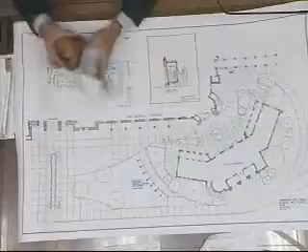...of the exterior walkway adjacent to the historic terminal, which, as you know, is being moved over to a position in front of the new air terminal, using the larger plan here. So it's along this walkway that we're talking about. The idea is to create a steel stanchion, so to speak, that would hold what we're calling these glass flags. We're looking at some technologies, a couple of ways to do that, and I'll pass out some samples.

Part of the idea came from an artist at the SeaTac Airport in Seattle who created a commemorative artwork on glass, displayed in their terminal. It's backlit on the inside of the terminal, and it depicts the historic nature of the Northwest area. That's a product or technology that uses glass to laminate the artwork.

We're also looking at other technologies. This is an example of a man-made product, and I've got a couple of examples to pass out, where the artwork is laminated into an acrylic or polycarbonate type material. The idea is that piece would be placed in here.

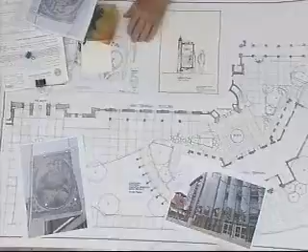Now the actual artwork, the content of what I'm calling these seven flags, would be subject to an artist RFQ process and selection process similar to the ones we used to select the three artists working on the interior of the airport. The Claysons Foundation has agreed to fund that process, the selection of the artist, and then the execution of the actual installation. So that's a very quick overview.

Here's a copy if people like to look at. That's the technology they use for the glass component. This happens to be the artist who did the work at SeaTac, utilizing a glass studio that does this work in Germany. We're not quite sure that's what we'll do yet, but that's the idea and concept. I have other material I can share if you need it. Essentially, that's where we are, and we'd like your comment, input, and so forth today.

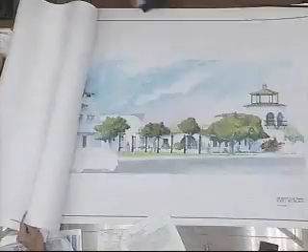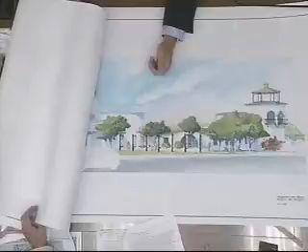We're assuming, based on the process we'll go through selecting artists, that it's not going to be a detailed piece of art that one has to walk up and see within a few inches. The idea is to tell the story in such a way that within a few feet, as you pass through and walk by, you can get the gist of the significance of the Marines being here during World War II.

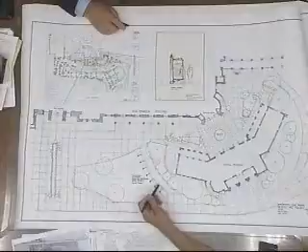Paul: Thanks, Gary. If we go back to the site plan, I have a question, following up on Gary's point. This is where the base touches the ground and the glass piece cantilevers. Do you have any visions of taking this hardscape so people can step into this area, or do you specifically have it so people won't be putting their nose right in front of it, two inches away? Yes, and we did that because there are some maintenance and abuse problems. So the idea is you can visually see it at a distance of 2, 3, or 5 feet, but there's probably no need to actually walk up and touch it, so to speak. Okay, thanks, Clay.

Mr. Chair, are there any UV issues? Will these things fade over time? That's part of the material selection process. We understand from the glass manufacturer that supposedly that's not a problem for their product, but I'm trying to get data on impact resistance, since you can imagine the issues with using glass. This material is supposedly impact resistant, but I haven't gotten an answer from the manufacturer yet on the UV factor. Supposedly it won't fade, but we want to make sure before going down any specific road that we have the material in hand. Leave it out on your porch for a few weeks and see what happens.

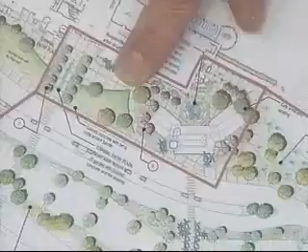That was going to be one of my questions, the impact and safety. I'm also curious, do you happen to have the landscape plan with you? I'm wondering what the planting scheme is. It's this drawing up here on the right, though I don't have the working drawing planting plan. What isn't shown in this plan is a tree that's on the actual final plan, right here, and this tree on the lower piece has to be moved over a little bit. And then there's a tree right here, so we just have to move that tree a bit to make this all work.

So has there been an approved final planting plan done? Yes, it's already in, so we have it somewhere, on file. Tony, do we have a copy of that here? I can go get it for you. I just want to make sure it's not agaves or something that people are going to walk up to and get spiked. No, it's that low grass material in between all those. So we have to rearrange that just a little bit. I think it's fine, Tony.

Okay, thank you. I had just two questions. Is this the final resolution of how this walkway enters with the patterns going on here? Yes, that was what was approved when we went through the ABR. Okay, I wondered if some study could go into these kind of confluences happening here, where walking right into the middle there is... Anyway, that's one question. The other is, it seems to me - I like the concept...

It seems to me that when you stand very close here, from here, this one is not too bad. It seems you're always looking at that screen from at least 20 to 30 degrees angle, and you never get to see that screen straight on or close to straight on unless you stand right at this edge. So as you walk along, if you're in the middle, you're virtually seeing that at a 45-degree angle from the middle of the walkway. Keep in mind these are viewed from both directions since they're transparent, so if you're walking this way, you're looking at it too. And the same thing happens here - you're seeing it at 45 degrees. The first view here you're probably seeing straight on, but here, from that center, you're still at 45 degrees. Is that an effective line for you?

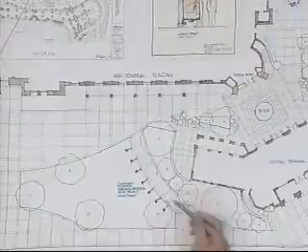We think that is. The idea is not that any one panel will tell the whole story - it's this whole collective idea of the panels. Also keep in mind that because of the nature of this project, it's an airport, so for the most part people are either coming or going and in some kind of time sequence, fairly busy. It's unlike an art museum where art sits there to be contemplated and looked at in detail. This art is meant to be captured almost like driving along the freeway - certain buildings have impact when you see them out of the corner of your eye. So that was the idea here: all seven flags tell the story, not any one singular flag. That's the challenge we're going to give the artist. I'm not opposed to moving the walkway out, but the concept was that this isn't the type of art you need to sit and contemplate.

Mr. Chair, another quick question - are these mainly images, or is there text on these panels? We're not sure yet. That's part of what we're still working out.

If you saw in the examples that were passed around, and this is the one in Arkansas, you'll notice most of it's visual images, but there were a couple that had dates on them or some text. Again, the idea is to see this kind of general overview, so it won't be detailed writing. There's no intent to have a detailed set of writings. There may ultimately be a small plaque somewhere at the beginning or end explaining who gave and funded the project and what it's meant to cover, but that has yet to be decided.

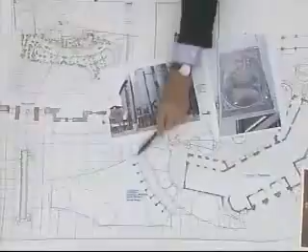7 flags. Could there be 5? Could there be 6? Or is 7 a magic number for a reason? It's 7 just because it looked like it worked with the length of the walkway and the area we had to work with. Now, whether it ends up 5 or 6, that's probably something we can negotiate with the artist. But given this distance to that distance, and given how we had already patterned this walkway, it just seemed to make sense and worked quite nicely.

Mr. Chair, I had one quick more question. Sorry. Yeah, okay.

The location, was that determined by the Clayson Foundation? No, we looked at 3 or 4 locations about the outside of the terminal. They originally asked to look at the inside of the terminal, but because of the 3 major art pieces going in now, plus the 4th element of bringing over the Channing Peak mural, the Fiesta mural—that's a fairly large piece going inside next to the escalators—we're trying to save room for art that will transition in and out of the terminal. So we were running out of space inside, and we started to look at the outside, in addition to bringing over the current 3-dimensional art the airport already has in place. We thought the exterior would be best, so we looked at 3 or 4 exterior locations, and working with the Clayson Foundation and the Visual Arts Committee, we settled on this recommendation for this piece of the site.

Okay, Gary? Mr. Chair, so back to comments. Thank you. I like the concept of walkable art and art that's available for the general public.

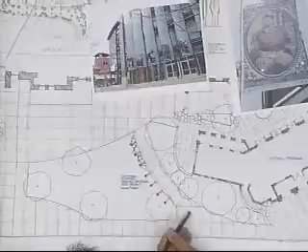The point I sense is that there are too many flags, because you don't get to see all of them at once or in a row. It's what Chris was saying and what's shown in this photograph. At our own harbor, you can line up and see all the flagpoles, and as you bend you start seeing all the flags, creating a linear thing. I never get that opportunity here because there are too many. Even lined up, you see each image, and it'd be nice to see all the fancy artwork in each flag panel. I feel like there should be 5 or 6. There are too many here because you can't sense what's happening since this other guy blocks the view no matter where you move. That's another issue that has to be tackled.

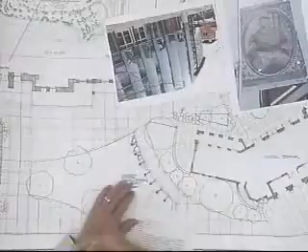But I think really the design as it is now, coming off of here, only allowing for a 45-degree view of it before you get cut off by the next one, is problematic. I'm a little worried about coming inside here, I don't know how that plays with ADA, where the walkway comes into each one, but that would be something to look at.

And so that's it for me - the hardscape, the lighting, and the layout - to be able to experience it fully. The project, certainly the location of it is...

I'm neither here nor there on that. I think you probably have challenges trying to locate this, and I wouldn't know where a better location would be, so I can't really think of one. Otherwise, I think they're well designed. It's just the layout, I think, is a little bit problematic.

Okay, so that's where we are. I do have one clarification - the actual content, because someone mentioned whether it's black or white or color or whatever. The actual content is going to be subject to the Visual Arts Committee as they go through that process. Yeah, that's fine.

Okay, I have a question for the applicant. The spacing, and determining the spacing - will that be determined before you hire the artist, or through your RFP for the artist? I'm sorry - the spacing of the flags, should that be ironed out prior to getting the artist involved if ABR has a concern that there might be too many, or should you get the artist's opinion also before you decide if it's going to be 5, 6, or 7 flags?

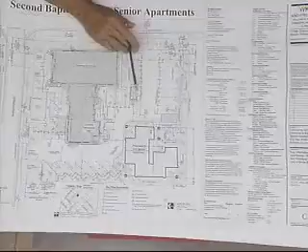Okay, go ahead. My name is Bill Spencer, I'm the architect for the project. We feel that we've addressed the concerns from our last meeting. One comment, I don't know if it was written, was that the trash enclosure is very close to the side yard. We had it over here on this side, but we've moved it since to more into the center of the site with a little bit of landscaping around it.

The other thing is that we've addressed and minimized the modifications. They're very minor, relating to the bicycle racks at the front yard, and the second one is the open area, open space. There are actually three concessions that we're requesting under state density bonus, and modifications—sorry, two modifications, not four.

And you're requesting it—have you gotten anything back from staff on it as yet? Yeah, we have communication from staff that they support our requests in general. Okay, and the two are?

Mr. Chair, under state density bonus law, the applicant is essentially entitled to three different concessions and incentives. One of those is to have a six-unit apartment building in the R2 zone, and staff has reviewed that request, discussed it with the city attorney's office, and actually supports that request. The other two concessions and incentives being requested right now are a reduction in parking for both the church use—staff is discussing this request with the applicant and would more like to see this as a modification request than something that comes under state density bonus.

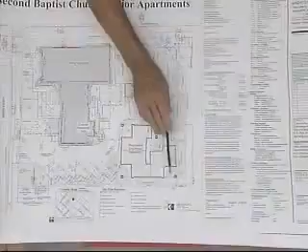Is that open yard modification in that area? Each unit has 120 square feet of private space, and they're also providing the 15 by 15 common space area, and then the 10% that isn't clearly shown on the plans currently.

Okay, go ahead. Let's talk a little bit about this. I don't know if we went over it last time, but part of this project is to solve the accessibility problem that the church now experiences, and we've done that with a series of ramps.

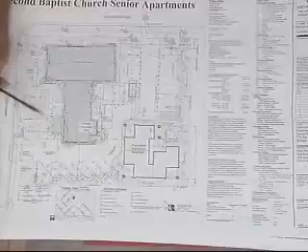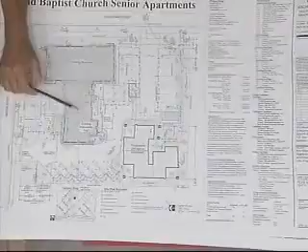We placed a handicapped stall in the front for easy access, so that both the fellowship hall and the existing sanctuary will have access from both people walking from the public way and from the handicap stall. There will be some minor adjustments to the rear for handicap accessibility because there's a difference in elevation within the fellowship hall, so that once the wheelchair person is aboard, they can travel anywhere through all the church facilities.

That pretty much covers the site development. We went back and restudied our exterior design to address the comments from last time. What we've added and changed is that we've added some siding to the second floor walls, and we've eliminated the canted or sloped pilasters.

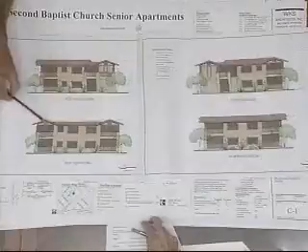So we've softened that. There was some comment last time, although it wasn't written, about possibly giving some variegation to the roof lines, so we've tried to address that to give a little interest to the roof. We've also introduced an open railing rather than the more solid railing we had in the other design.

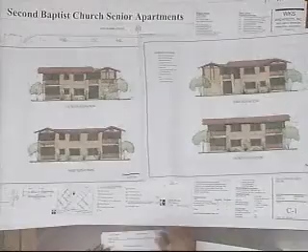Okay, I'd just like to go down these items here. You have photographs of the surrounding properties - this is number one of the motion. We did not submit that; we provided a context plan that I don't have a copy of here. I believe Dan has it. Okay, so we have to repeat number one.

The board expressed concerns with the number of modifications. Have we been able to reduce any of the requested modifications? We did eliminate the request for a modification related to the trash enclosure, which would have been a side yard setback one, and we actually did pull some parking out of the front yard setback as well.

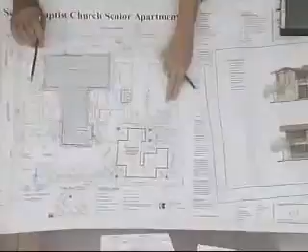This trash enclosure had been over in this area, and there had been a request for a mod for that. But we really can't reduce any of the other mods because we've got to find someplace for our bike parking for the church. Because this is a commercial or non-residential use, the setbacks are much greater in R2 for this use, and there really isn't a better location for the bike parking because it's required for the church, not for anything else, than right here because of the ramping and everything that's going to have to be provided. So that was a bit of a challenge.

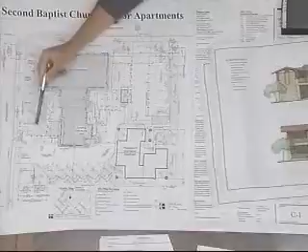And then we have the request for the mod over here to allow these two parking spaces to encroach further into the setback than is normally required for a non-residential use. So I think we've reduced them as much as we possibly can, given the fact that it's an R2 site.

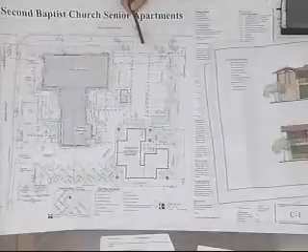Can you show where we've added additional windows to the living room and consider eliminating the plaster box-out pattern? Yeah, I discussed that before - the plaster was the dominant feature we had before. We've added...

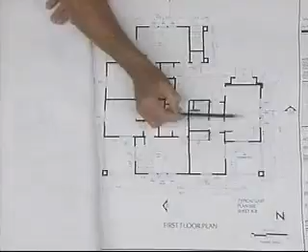Actually, two additional windows to the living room and dining area. There's a sliding door that takes you to the patio, both from the bedroom and the kitchen area. So we have fenestration here and fenestration there, good cross ventilation here, also with the bedrooms - good cross ventilation. So what we'd like to see is what we look at neighbor-wise here and neighbor-wise there, while we've increased the...

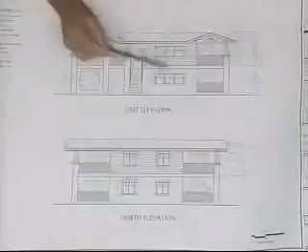These are windows to the living space, and these are windows to the bedroom. Okay. Likewise here again. So here, this will probably help some.

Okay, I see the concept. So I'd like to... we have a speaker. Do you have any landscape design to present, or any other portions of the project?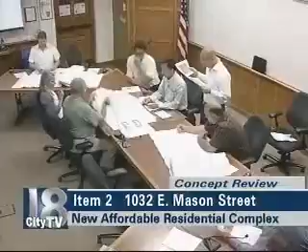These are all, everything you see here is new. The hedge that runs along here, we're hoping to maintain that. The church wishes to maintain it, the hedge that runs here. This new fence will be developed here on this property line. New trees will be introduced in the existing planting area, and feature trees within the courtyard, the motor court area.

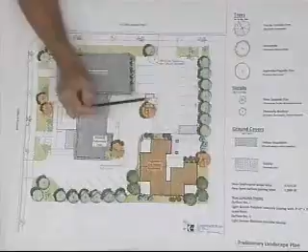Okay, is that a handicap? That's just a walking pattern? Well, it's a painted striped area to have kind of a safe alerting of people using the trash, you know, the residents within. Is this a handicap spot here? Yeah, and that's there. Okay.

Okay, we have a speaker. You filled out a form, Bill? What? No, that's me, I'm the speaker. Okay, yeah. So we don't have any other speakers. Okay, so I'll close public comment and bring it back to staff.

For public comment, we do have one letter in opposition from Paula Westbury. Thanks very much, and then I'll bring it back to the board for questions. Gary?

For questions? Okay, I'll start that end. Chris, you have questions? Couple of questions.

The existing street trees, are you proposing to change any of those, or have you looked in to see if there are requirements for street trees on this lot? No, we haven't been told that there's a requirement for street trees.

But you are looking into the SWMP, the drainage, for the BMPs and all that good stuff. Yes, that'll thoroughly be gone through the drainage aspect. Okay, and that'll be in your final plans, what you're proposing for that?

It looks like you've shown a couple little areas where you're going to have detention basins of some sort. Is that what these dotted lines represent? On the landscape plan, yes. To be highlighted, I don't know, but I think that's what this is denoting.

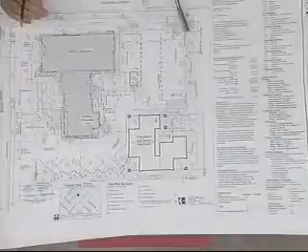And then these two parking spaces encroach into the front yard. Those two aren't new. They have been there all along. They're already there. Yeah, that's what I was trying to get from the aerial. Okay.

I think those are my questions at the moment. Thanks, Chris. Paul?

Continuing with the parking, did you comply with the parking demand study that was done? What was the actual number of parking spaces on the property when it was a church versus the number being proposed? There were 23 before. Now there's 19... right here, 24 that's required. We're providing 21. So the total existing parking stalls are 23, and we're going to be providing 21, so we have less.

Before it was 23, now you're doing 21. That's correct. And now you're providing handicap spaces? How many do you have to provide for a lot of 21 spots? We're providing two: one for the residential uses and one for the church. I thought this church, based on the size of the parking lot, would require 2 handicap spaces, but it only requires 1? It's less than 25 spaces, that's why.

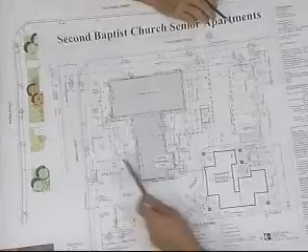And the handicap ramp in the front, you designed this as a 1 to 12 versus 1 to 20 ramp? So it's as steep as it can be? Because 1 to 12 is the maximum slope for a handicap ramp. Do you have it without handrails? No, we are planning handrails.

And that's all my questions. Okay, thanks. Gary?

Just one question: the size of the tree you're going to remove for putting up those 3'6" decorative walls, over on the Voluntario side. It's a 16 inch tree. What kind of tree is that? It's a pepper tree.

I don't have any additional questions. I think all the questions were asked already. Okay, so I'm going to bring it back for comments, and I'll start with Chris on your side.

Question for Tony: for a project of this type, is it required that there be a landscape architect involved? Let me look at our licensing requirements.

I'll continue my comments while you're doing that. Part of my concern is that the landscape plan could be developed a little more. We're using one or two ground covers throughout, and I think there are areas, especially along Voluntario Street, where we just have one solid mass of ground cover. After looking at the pictures, it's a pretty tall building there, so some vertical relief would be in order against that building, with certain accents or additional medium and higher planting.

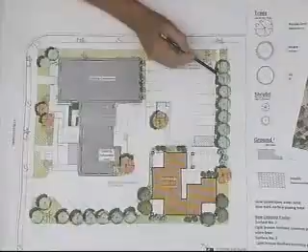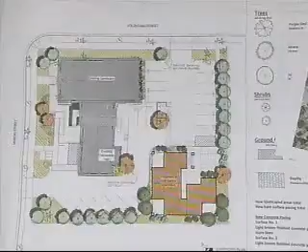Yeah, so that's something else to be looked at in terms of what that spacing should be, at least probably 15 feet at minimum for jacarandas. It's almost 20 feet, almost every other one, so you could almost take out every other one. When you draw these in, show the canopy as almost fully grown so you know what the spacing should be.

All right, and Tony, did you have an answer on this first project question? Yes, it does require a licensed landscape architect. So a lot of those issues will then be resolved once you get a landscape architect involved.

I read in the code that if there was less than 5,000 square feet of landscaping, it didn't have to be a licensed landscape architect. Is that in the code, less than 5,000 square feet of landscape? Well, it says in general all commercial, industrial, institutional, and multifamily projects have to have a licensed landscape architect. But then it says plans prepared by unlicensed persons may prepare landscape plans for a project consisting only of landscaping for 5,000 square feet or less.

However, the ABR may require a licensed landscape architect to prepare plans for these following circumstances: one, the unlicensed person's landscape or irrigation plan submittals are determined inadequate or do not meet minimum review standards; and two, the proposed project involves extensive grading, revegetation, or improvements with unique or sensitive habitats or environments.

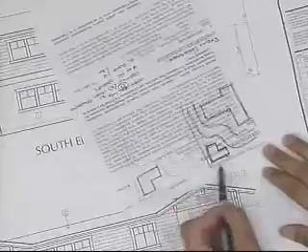I'll show it to you first. Did we ever have an option in which you showed the corner open this way with the road? Because this is the way you currently have it. Did you ever come with a design like that? And then we suggested you turn it this way because this is your stairs going up, and then this becomes the 15 by 15 area.

No, what we had before was one of the concepts was to have the open space here of the building moved this way. I guess I'm okay with the layout that you have, the site plan, the way it's being utilized. I'm not going to recommend changing anything.

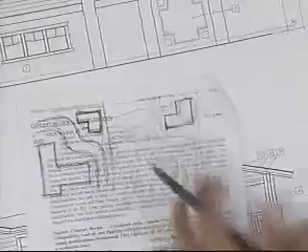The only concern I had was this west elevation, this corner. I'll show it towards the TV camera guy. If this is where the church happens to be located, this unit right here, I'm thinking that on the first floor it should be a solid wall at the patio versus the open pickets because of the amount of the roadway work. Or if it's minor enough, all the other ones being open is fine, but I see, not that you're going to have a lot of zooming cars going through a church parking lot.

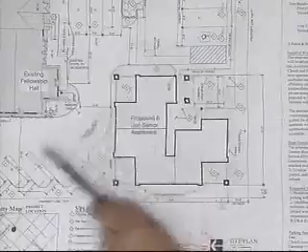But that's the one thing I saw in that one corner, and it's just a comment from one person. If you go to the site plan, it'd be this wall and this wall here should be solid on the first floor to give this person a little bit more privacy, because there will be vehicles traveling through there.

Could we do that with landscaping as a buffer? That's how you can come back to it. It's only one comment — I see how all these other things work, but when you meet with a landscape architect, that's a concern that I had.

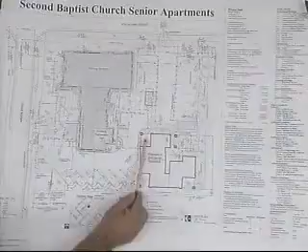Some of the comments last time were pointed towards the columns and increasing or making the massing appear to be too large, and the comments I'm going to be headed towards are towards that. I still feel that the second story massing really appears to be much larger than the building is because of the covering of all of these porch areas that you have and how you have the gables pointed to that. I think our building is looking a lot larger than it needs to be, and perhaps some of these outdoor living areas on the second floor shouldn't be covered.

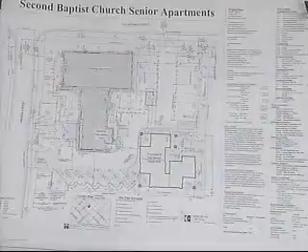I think we did lose some architectural character from this, so I'm not really pleased, as Clay made the comments about the columns coming all the way up almost two stories and making the porch in these outdoor living areas. I think the design isn't there. The design development of how the building is integrated second floor to first floor isn't working out.

One of the things I remember from last time, the plaster detail that you have here, this plaster relief, isn't really working for me either as far as the character and style goes. So in my mind, it still needs some major work towards how these areas are brought down to reduce the mass, bulk, and scale. I'd like to see what the other board members feel about the massing.

I'll first touch on — I want to re-emphasize, I really think you need a landscape architect. With the encroachment of all of this hardscape into what was more of a green space, and the fact that this is raised to get up to the door, all of this raised area here — I think because we've lost all of that open green, we really need a landscape architect to try and give that site a little bit more than it had before, with this change. So I want to reinforce that fact.

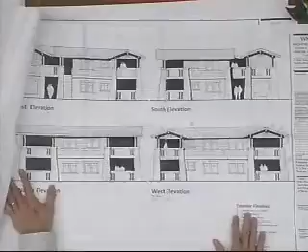Here, we'll put it up there if you like. That had the project really go in the direction it is, because I don't think anybody on the board currently is, no offense, too flattered with the current proposal in terms of style. And I think at least that proposal, with the tapered columns alone, gave it some sort of, like Paul said, keeping it simple and in the affordable housing component, gave it a little bit of design style.

I'm leaning more towards what was happening before, because I think it was going in the right direction. But if there was something else that was overreaching, that we hated the columns, therefore that got into the minutes, I would hope the three of you would intimate that. Or was it just a comment about the columns and the massing that got interpreted into what we see today? I believe that's what got interpreted.

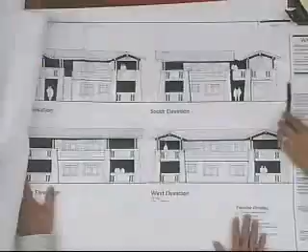Right, because Don was talking about the columns. It was Don, Sherry had a concern too, having to do with this area here where the stairs went up, with two columns happening right over there. This is kind of like a wing wall, and that became like a plane with the stairs behind it. So it was more of the heaviness happening with the columns.

Okay, that's how... I'm just trying to understand the comment, because I see a little bit more design aesthetic happening in the previous design. Not that should be the end-all, but I wanted to understand what the comments were, so...

Yeah, and I think that's right. I think overall I agree with you, it has a little bit more style. There's a style that's been chosen, but I think what we're seeing is that it can also be less heavy. The building is just looking too heavy, and that comes back to even the present review.

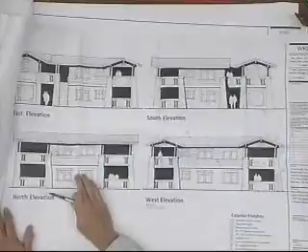What's presented underneath here, where we commented on the opportunity to possibly make the porches a little bit lighter. So things like this shadow line out here, where that floor extends over the... it's a box out.

This is a box out. Right, and that doesn't happen on the new one, right? Yes, it does. Oh, so it's just not... well, you don't see the shade and shadow on it. But this definitely is a different plane.

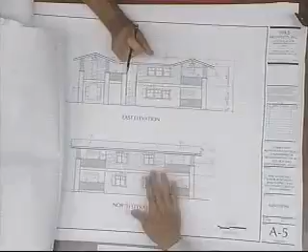And what is the distance in that plane there? What's the differential? Two inches, or just a two-inch box out? To me, that's sort of what's making the top portion here feel that much heavier. We haven't lost that portion of it.

Mr. Chair, I do believe we had comments last time about the massing, about how heavy the top was. It didn't get incorporated properly into the minutes, but massing was still mentioned. I think that's the direction my thought process went, that it wasn't completely developed from our first go-around. And although I understand Paul's comment about wanting to move it forward to Planning Commission, I'd hate to see something get a second review, go to Planning Commission, then come back and say, well, we've already approved this direction.

To be honest with you, I'm not comfortable with the second story. I'm comfortable with how big the rooms are, how big the buildings are, but I think there are architectural things that can bring the building in, make it smaller. I'm not talking about plate heights or ridge height, but how things project out towards the end, how linear it is, and the columns still aren't that well resolved. I don't believe ground floor columns coming all the way up to the second floor is the right process for this design.

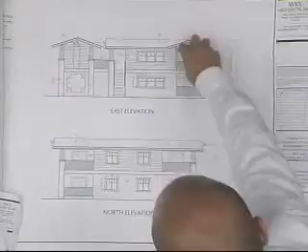And I think fixing the roof areas over the trellises, maybe breaking down these corners at the second floor, is going to help with the general boxy, shoebox-ness of the project.

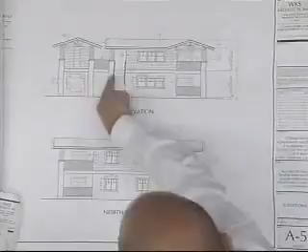I think these 6-inch faux columns that in elevation read like a column, but they're not, and this wall here, I think that could probably go away. That whole wall could go away, and you could really open it up a little more, and that would reduce mass. I think those are good comments.

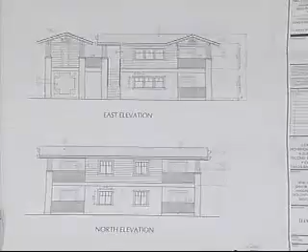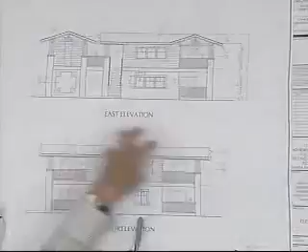Perhaps what we could do here is send them on to Planning Commission with comments that are positive about the size of the structure, but we'd like to see refinements in the architectural elements that could visually lighten the building. Specifically, we'd be looking at this area with the columns, and at the patio areas where roof elements could possibly help lighten the upper structure.

How do we feel about that? Mr. Chair, I'm just noticing from a survey done in August of last year that the parking lot is actually encroaching toward the street. I believe it was said that it's not getting any further toward the street, but it does necessitate removal of that pepper tree. I can share the survey if you didn't get one in your packet.

The removal of a nice pepper tree. Here's the pepper tree, and I think they showed it on the first page. So it does shift a little bit towards here. Yeah, this is the existing 16-inch pepper.

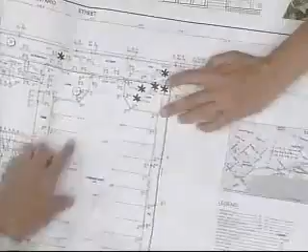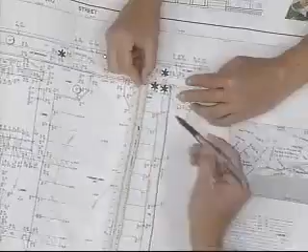What's the scale on that? 1 inch to 10 feet. So it's a 30-foot setback required there, Dan, is that right? It's 15, okay, from here. So it meets it now - this is 15 here, right? Yep, yep, so it meets it now, and it stays there.

It doesn't move. No? Yeah, it does - it's because it encroaches, then it goes in 5 feet. It does move in, 5 feet closer, I believe. Let me look, can we see that site plan? To adjust the parking a little bit, yeah, to increase it. I think that's right.

But that's what you applied for already. Yeah, this did apply for that, right. Yeah, but we're going to lose that tree that was right there. Yeah, so we did move out 5 feet.

I started to look at that, and it looked very funny to me out here. So this is the required setback for these two parking spaces. The required setback's 15, and we're at 10, so we're 5 feet into it.

Okay, any further comment on that revelation? Okay, then we're good for a motion, and I'm open to a motion. This would be passing it on to Planning Commission. I'll float a motion, or I'll make a motion.

Sending the project on to the Planning Commission, then returning back to the full board, with the applicant studying the architectural roof plan and reducing the roof elements over the second floor outdoor living spaces. The applicant studying the stairs going to the second floor and removing the pilasters at the sides of the stairs. Just study it and come up with a solution there.

This is the existing building, as you recall, and then we just went to a simple one story with a small monitor for circulation. Going back to the floor plan, we have the replacement of a kitchen, shower, and lockers downstairs, with storage over the top, and the rest is just the volume of that building space.

Showing the section through here of how that happens. So actually, upon your direction, I think we looked at it and lowered it, basically, and found that it could work. What's the... Tony?

You have the drawings from the previous. So the existing building is what height? It's about this height, about 14 feet. 14 feet. And we're going to 24 feet 6 inches.

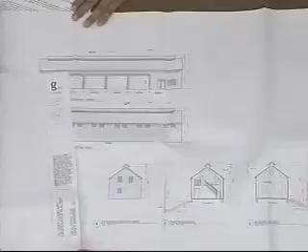Right. Okay. So the last one was 28 feet. Okay, okay, all right, continue. Sorry.

The same materials are used, replacement of a metal rigid frame building with a new rigid frame building to meet their needs, with a little higher volume. But we looked at the minimum height and they can do it with this height. That's basically it. We do have the landscape plan that you asked for to screen the adjacent house.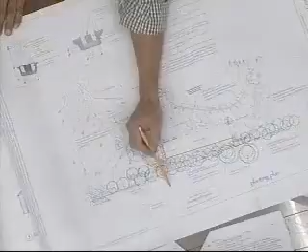This is the house in question, and that's not a very good representation. I just stood here and eyeballed it, but that's basically where it is, pretty close to the proximity. And then there's the property line, right? And there's another one there, right? And this dash symbol is the existing.

So there's a lot of material packed in along here, and then there's some big multi-trunk eucalyptus, and then more back to more dash symbol. And there's also 4 pine trees along here, pretty big, like 30-inch, 24-inch, and then there's this 8-inch one that's pretty close to the building, so I'm proposing to take that out.

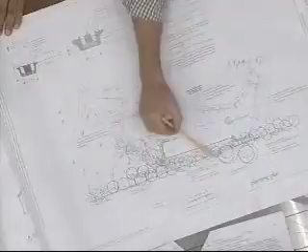And then come in with California Bay, a native tree, and there's quite a bit of shady material. So there's a big tree mass here on the southwest side. This is the only opening right here, so we need a tree that's going to perform in sort of a shady environment.

So I picked California Bay, 1, 2, 3, 4 times, and then I've also got a couple of oaks that I thought we'd turn loose to provide a little bit of habitat. And then we've got a western redbud at each corner, and a tough Raphiolepis, just a shrub to provide landscape where we can get it.

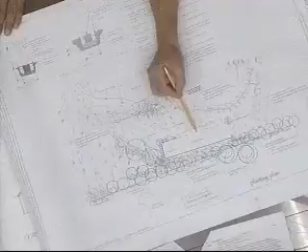It's a utility building, it's mechanical, they call it a shop. So not too cute. It is screened off pretty well from the cemetery itself.

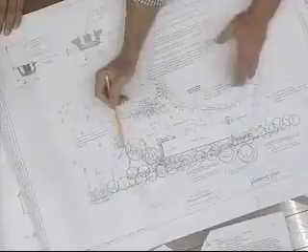And then just a little bit of native planting around. There's a slope here, a little bit of Catalina, ribes, and then a few Laurus nobilis to try and help that guy. So that's it. And then I've got a second sheet that's irrigation, one new valve, and then some notes for the contractor.

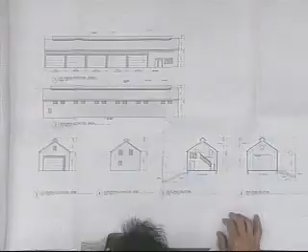Mr. Chair, you have a question. Yep, go ahead. Is there a color chart, or did you choose some colors for this? No, we haven't yet, but we're looking - I think right now it's kind of a gray building, we're looking more towards a green building. They have standard color charts for these buildings that we haven't brought to you yet. We're planning to bring it in the next phase. Okay, thanks.

Is there a rationale you're using for the 14-foot plate height? Well, they need the high doors here, and that's what they needed for the equipment to go in, and some of it has this high backhoe thing that rises up in there to make it work and work on it. On the inside? On the inside, right, I see, once we get inside. Okay.

All right, okay, so I'll bring it back to the board then for comments. Gary? I appreciate the removal of the dormer. I still think the height is probably a tad too tall, but given the location of this and how it appears from the public, I think I'm okay with the 24-foot height. So I'm ready to see this project move on. Okay, thanks. Paul? Chris?

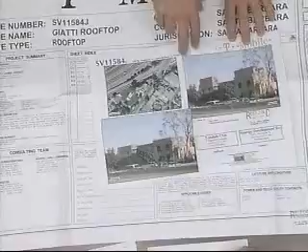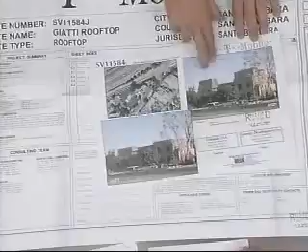The first one had a design. The main purpose here is to try to blend in 3 antenna sectors in the back of the building. The original design had 2 smaller, much smaller massings in the screens, and per direction I came back with these uniform screen walls, about 28 feet long. I can go to some elevations here.

Tony, do we have minutes? Thanks.

So this will be continued indefinitely to full board. The board appreciates the technical difficulties and the criteria involved with the antenna design and finds that 2 smaller antenna enclosures is more acceptable than 1 large antenna enclosure. The enclosures are to be more integral to the existing architecture with regard to detailing and location relative to the existing composition. Thank you.

And site plan view, and this is the view kind of along the railroad tracks as well as along 101, which I believe was kind of the most critical view to the board.

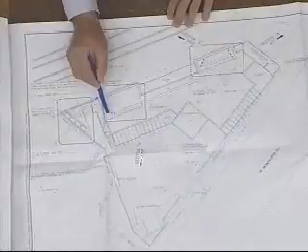This is one of the antenna sectors, and these are the other 2. The original design had sort of a chimney-like element over here, and this one, these two were kind of crunched together in a smaller box element.

So we stretched these out. They go from the roof deck height of 33 feet up to the top of 43, so it's about a 10-foot tall screen. About 7 feet is visible. There's about a 3 or 4 foot parapet. Length on those is 28 feet, and just to give a little bit of relief, we've got them set back about a foot or so from the edge of the parapet.

You want to run us through the elevations here? Yeah.

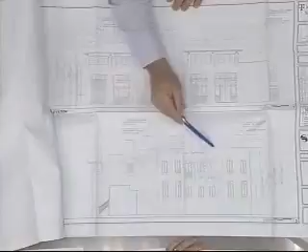The architect had played around a little bit with doing some boxed-in windows that I think, at least in my opinion, don't really fit with it. He was trying to break up some of the solid massing. We've got the roof deck here at 33, and then there's about 7 feet above that for the antennas to make a setback requirement to have the signal propagate out over the parapet.

There'll be 2 access doors. One is right here, and those will be flush in with just a little bit of relief there.

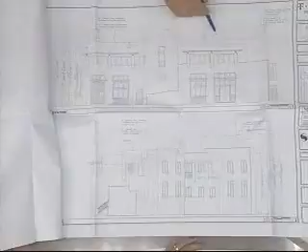And this view, which would be looking like, let's say, from Montecito Street, most likely you're only going to see maybe the top foot or two, just due to the angle from the street level, because it is set back probably 25 feet from the face of the building.

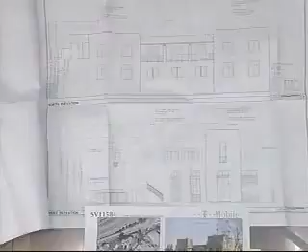The building itself has got quite a bit of different elements going on, from these column elements. There's some wood trellising. We played around a little bit with that on top of here, and in the end we thought that just a plain screen worked out the best.

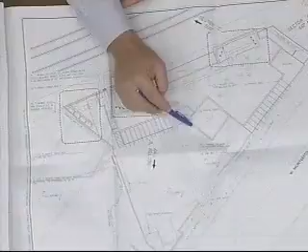There's a tower element in the front of the building, and we looked at incorporating the antennas in there, but we had to get more of a 14-foot height to get that setback. We laid that out, and it really popped out as a clock tower type feature rather than this integral little tower that exists currently.

Okay, that's my question. Thanks. I have no questions. Comments? Comments, Gary? I find nothing about this proposal acceptable.

It increases mass, bulk, and scale. It makes the buildings look huge. It has no architectural character. There's nothing about this proposal that I could remotely be okay with. The height is too high, the mass is too much, it's just not an acceptable proposal to me. You went the wrong direction.

Paul? Thanks, Paul. Clay? Nothing additional. Chris?

I have to say that I agree with every board member. This is one of the buildings that unfortunately is very close to the highway. It's very big and blocky. It's right next to the railroad. It's considered one of those buildings that is in your face when people travel to Santa Barbara, so this is one of the buildings they see, unfortunately, because it's a big, blocky building.